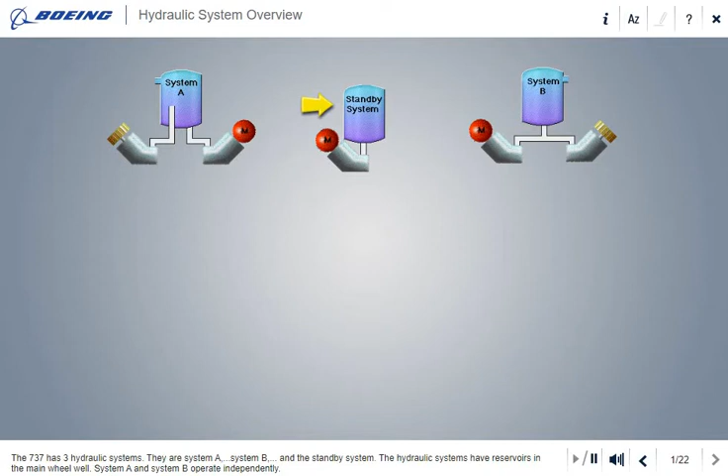The 737 has three hydraulic systems: System A, System B, and the standby system. The hydraulic systems have reservoirs in the main wheel well. System A and System B operate independently.

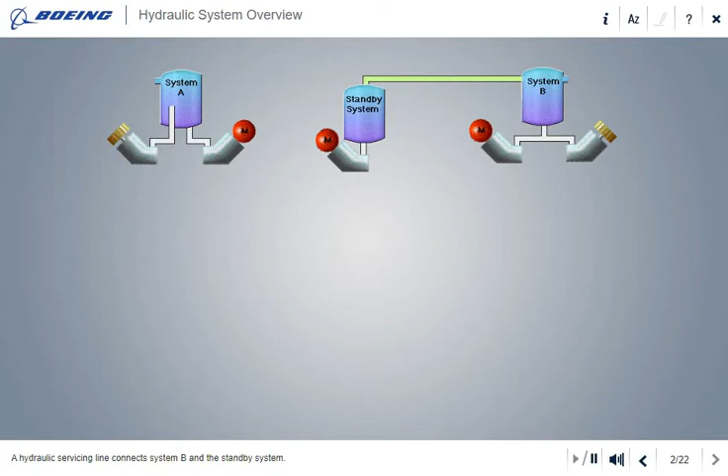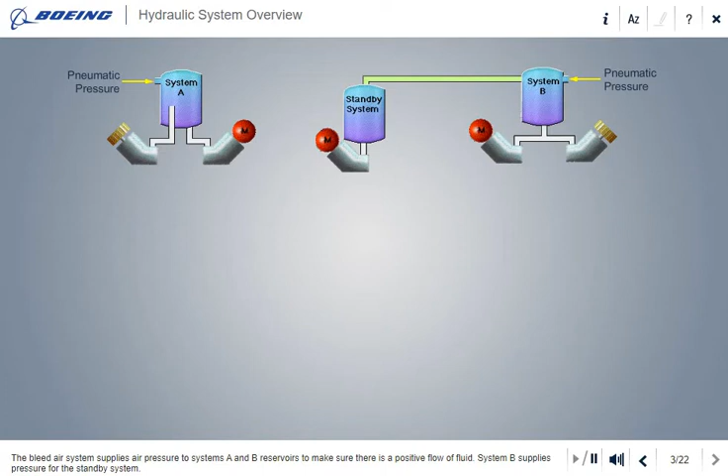A hydraulic servicing line connects System B and the standby system. The bleed air system supplies air pressure to Systems A and B reservoirs to make sure there is a positive flow of fluid.

System B supplies pressure for the standby system. The number 1 engine-driven hydraulic pump and an AC electric motor-driven pump supply the pressure for System A. Under normal conditions, the number 2 generator powers the electric motor-driven pump for System A.

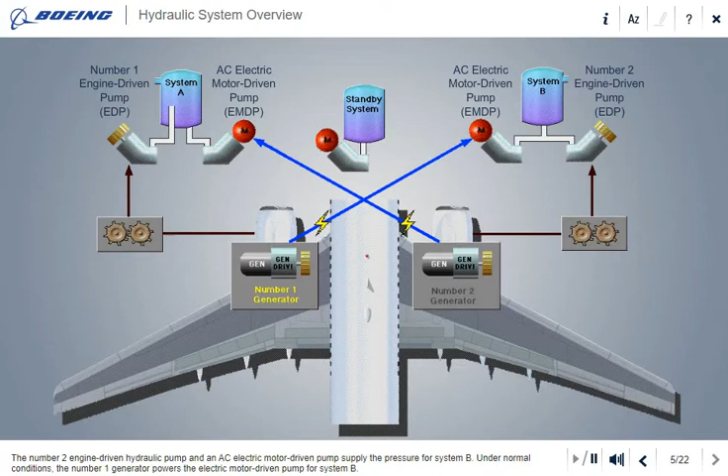The number 2 engine-driven hydraulic pump and an AC electric motor-driven pump supply the pressure for System B. Under normal conditions, the number 1 generator powers the electric motor-driven pump for System B. One AC electric motor-driven pump supplies the pressure for the standby system.

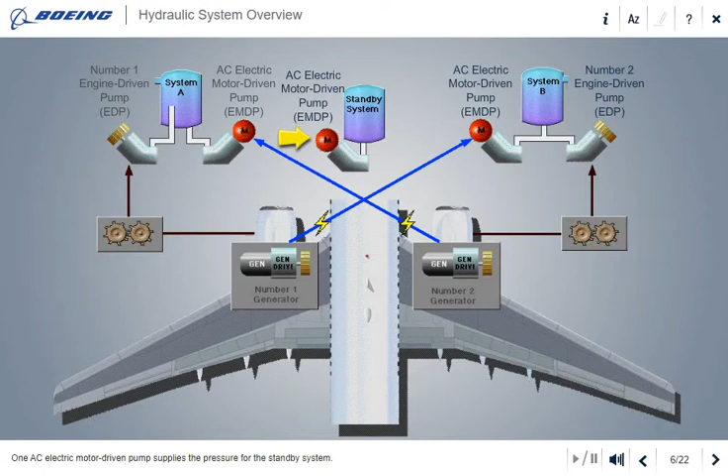System A supplies hydraulic power to these units, and System B supplies hydraulic power to these units. If Systems A and B do not operate, the standby system is available to supply hydraulic pressure to the rudder, the leading edge devices, and the thrust reversers.

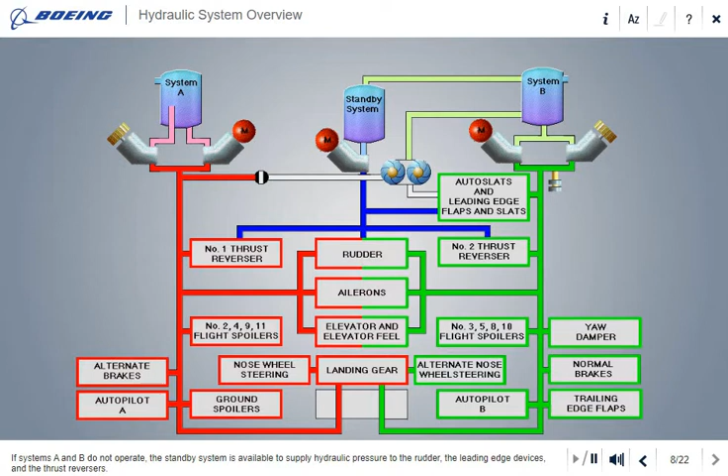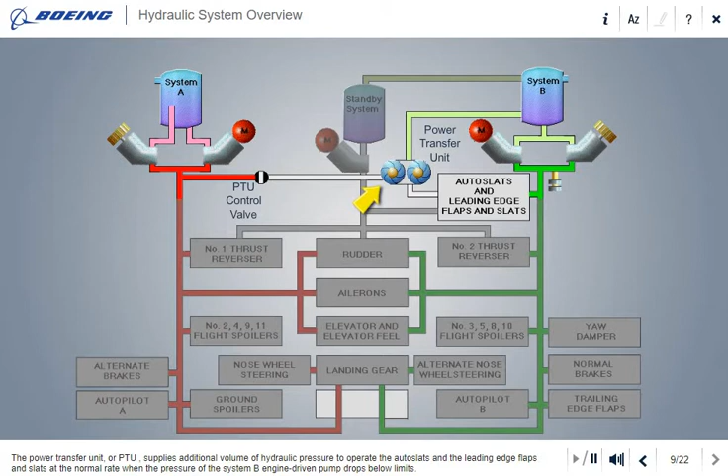The Power Transfer Unit, or PTU, supplies additional volume of hydraulic pressure to operate the auto slats and the leading edge flaps and slats at the normal rate when the pressure of the System B engine-driven pump drops below limits. The PTU control valve opens when the output pressure from the System B engine-driven pump drops below limits.

This occurs when the airplane is in flight, and the flaps are less than 15 but not up. When the PTU control valve opens, System A supplies hydraulic pressure to operate the PTU. The PTU uses System B fluid to supply pressure for the auto slat system and the leading edge flaps and slats.

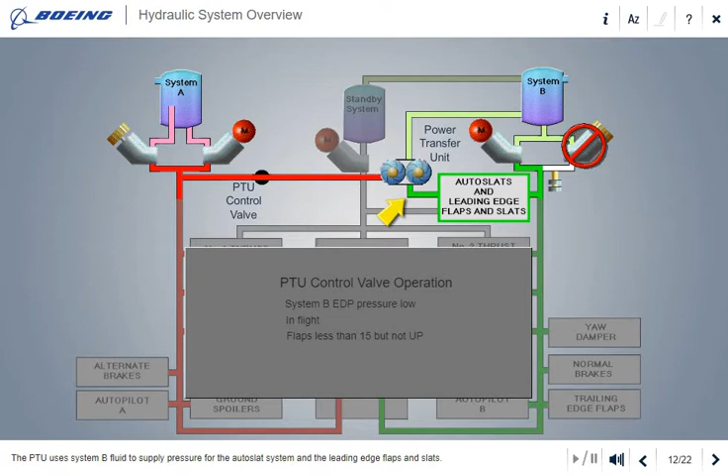If the number 1 engine fails, the landing gear transfer unit supplies hydraulic fluid volume from System B to raise the landing gear. In System A and System B, the engine-driven pumps supply a larger volume of fluid than the electric motor-driven pumps.

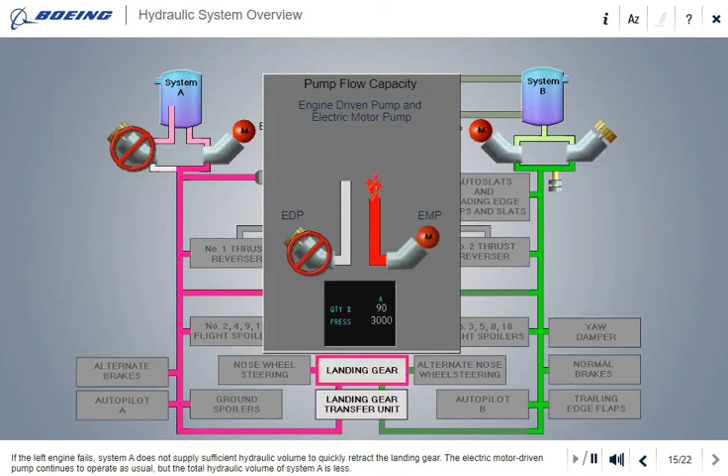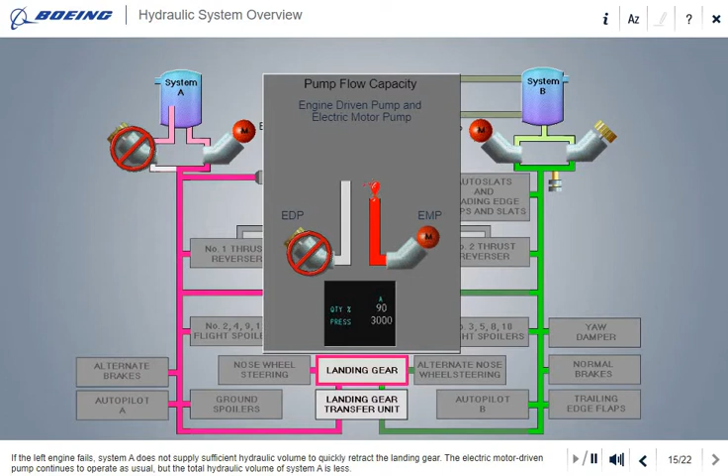If the left engine fails, System A does not supply sufficient hydraulic volume to quickly retract the landing gear. The electric motor-driven pump continues to operate as usual, but the total hydraulic volume of System A is less. The landing gear transfer unit operates when the number 1 engine N2 is less than idle.

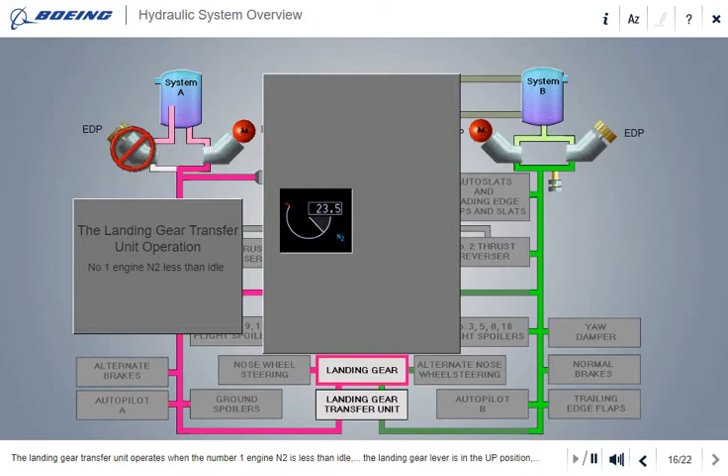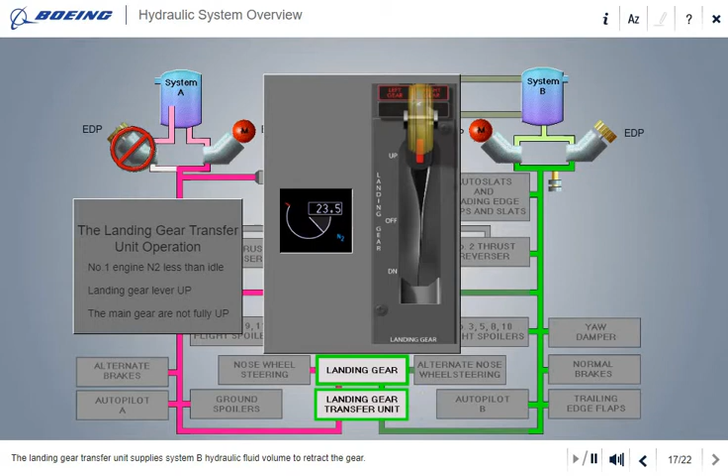The landing gear lever is in the up position, and one of the main gear is not in the fully up position. The landing gear transfer unit supplies System B hydraulic fluid volume to retract the gear.

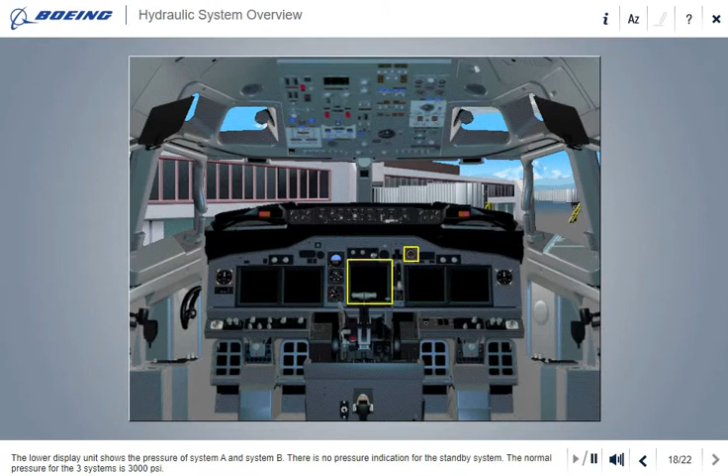The lower display unit shows the pressure of System A and System B. There is no pressure indication for the standby system. The normal pressure for the 3 systems is 3,000 psi.

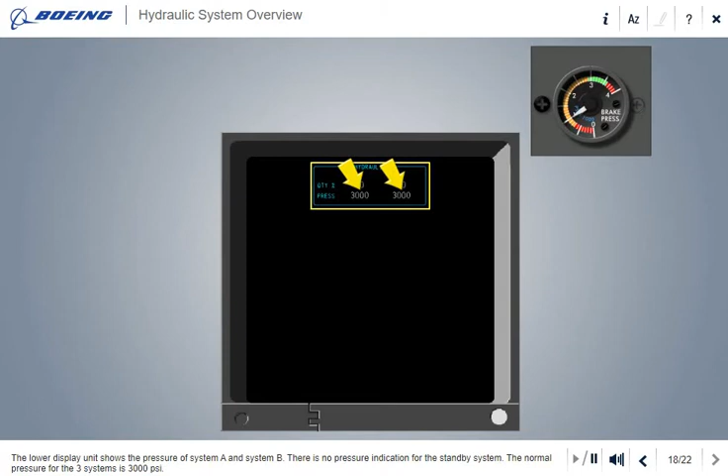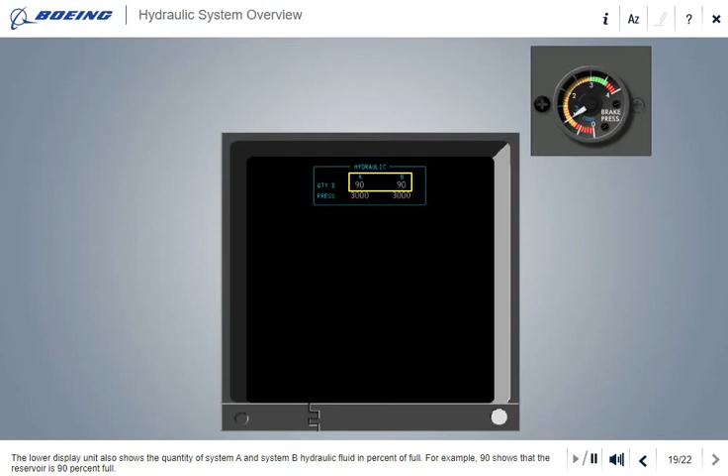The lower display unit also shows the quantity of System A and System B hydraulic fluid in percent of full. For example, 90 shows that the reservoir is 90% full. If the quantity is low and the airplane is on the ground, the system shows the letters RF or refill adjacent to the quantity indications.

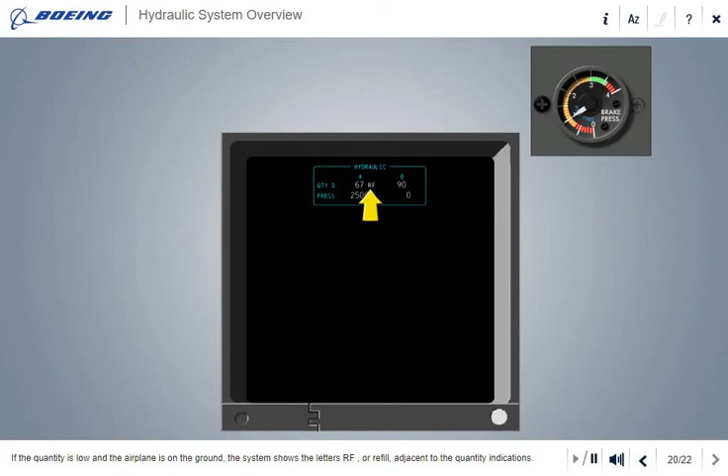The hydraulic brake pressure indicator shows the hydraulic brake pressure. The normal brake pressure is 3,000 psi.

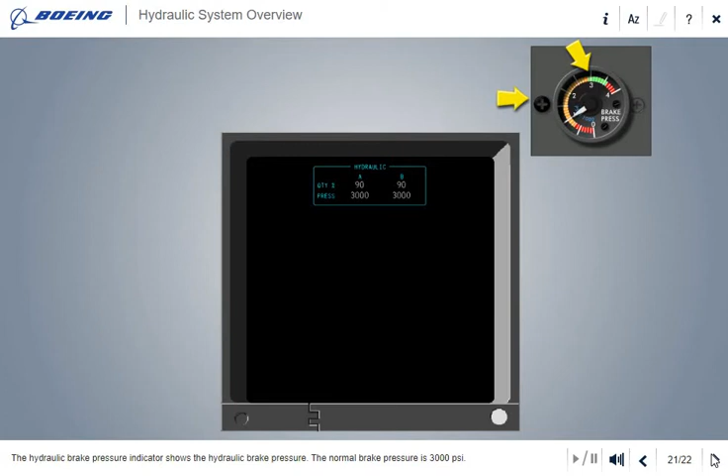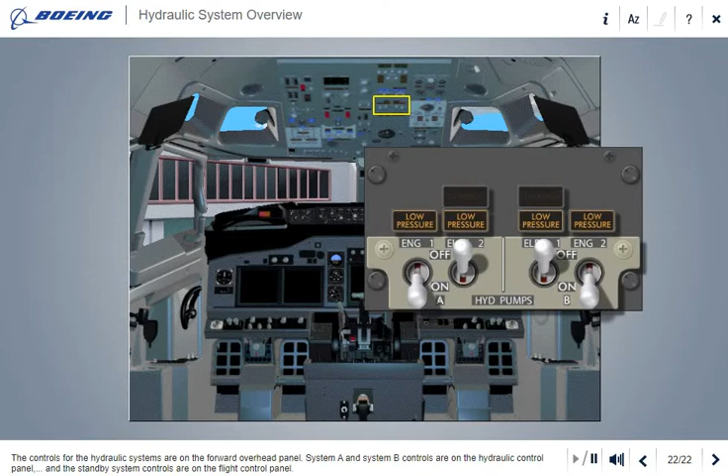The controls for the hydraulic systems are on the forward overhead panel. System A and System B controls are on the hydraulic control panel, and the standby system controls are on the flight control panel.

Now let's discuss the normal operation of the hydraulic systems A and B.

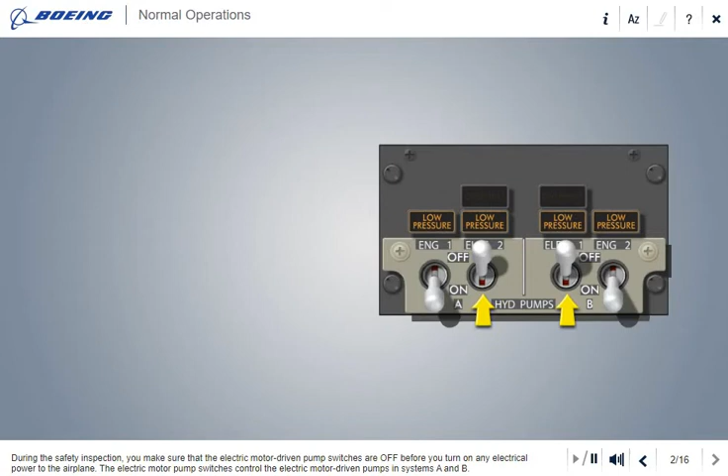During the safety inspection, you make sure that the electric motor-driven pump switches are off before you turn on any electrical power to the airplane. The electric motor pump switches control the electric motor-driven pumps in Systems A and B. The engine-driven pump switches control the related engine-driven pumps.

Systems A and B lower the temperature of some hydraulic fluid with heat exchangers in the main fuel tanks. Before you operate the hydraulic system on the ground, you must make sure that there is fuel in the main wing tanks.

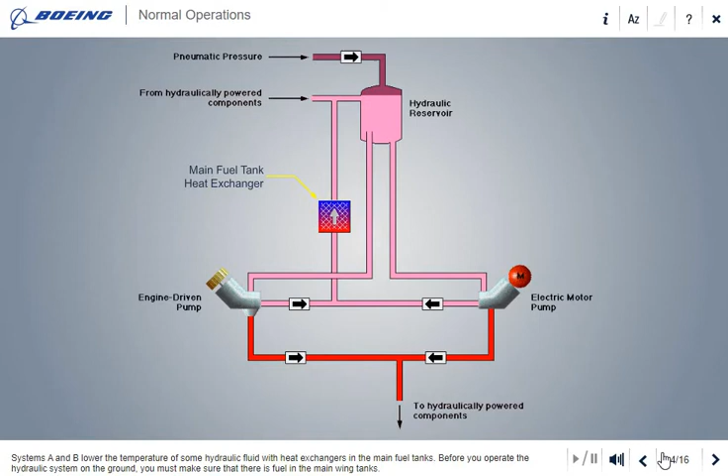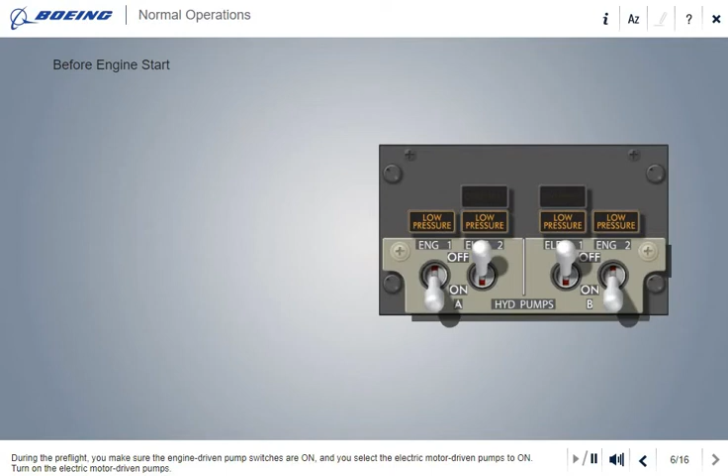The low pressure lights show that the output pressure from the related pump is low. During the pre-flight, you make sure the engine-driven pump switches are on, and you select the electric motor-driven pumps to on. Turn on the electric motor-driven pumps.

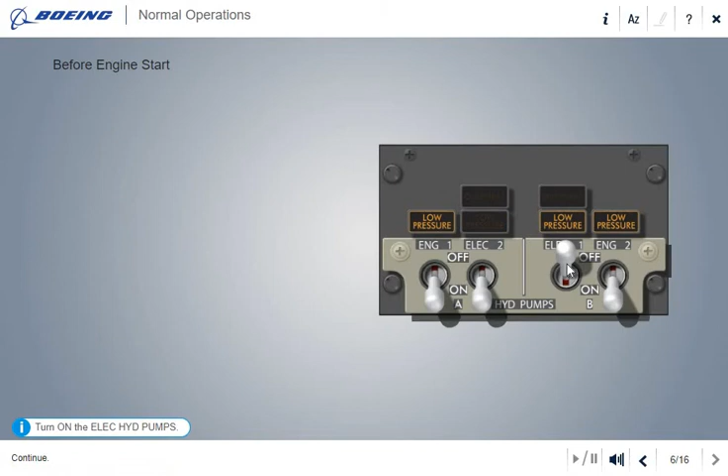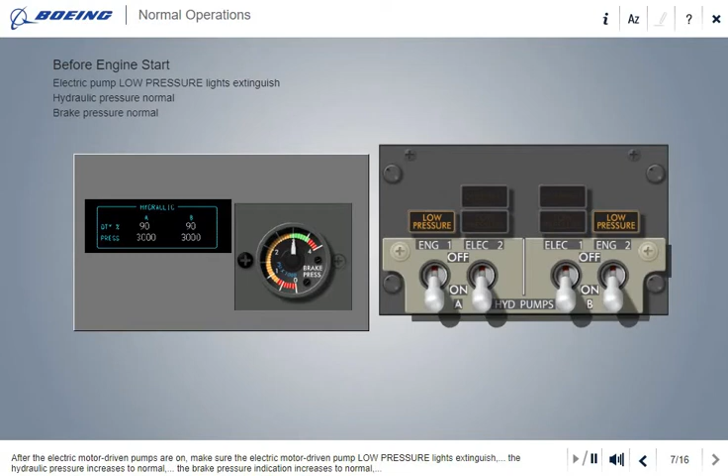After the electric motor-driven pumps are on, make sure the electric motor-driven pump low pressure lights extinguish. The hydraulic pressure increases to normal. The brake pressure indication increases to normal, and the hydraulic quantity indications do not show RF.

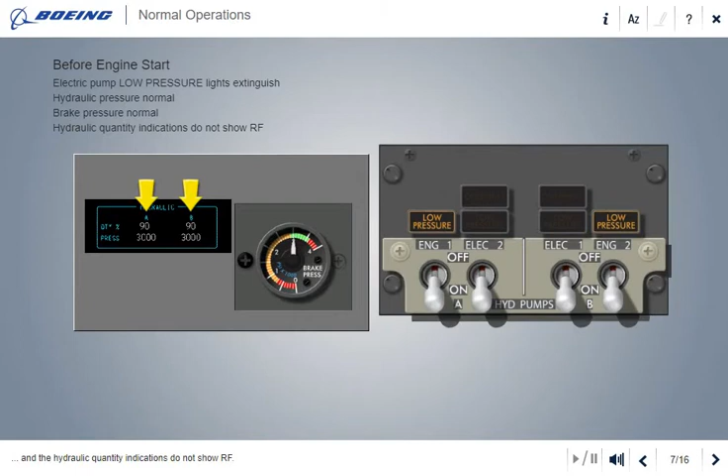During pushback, if the nose gear steering lockout pin is not installed, you must turn off the System A hydraulic pumps.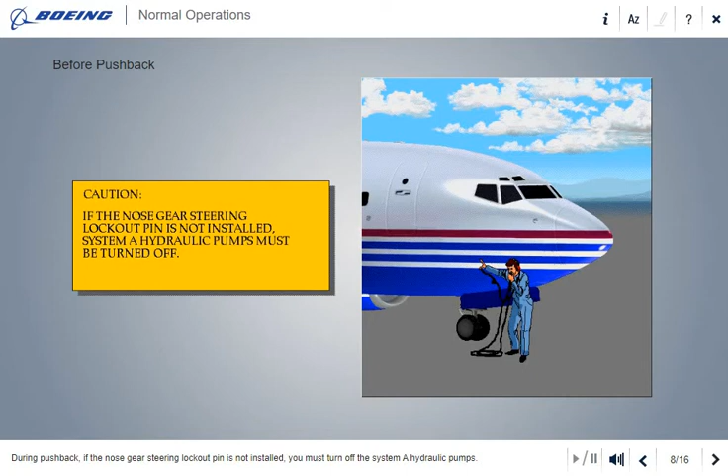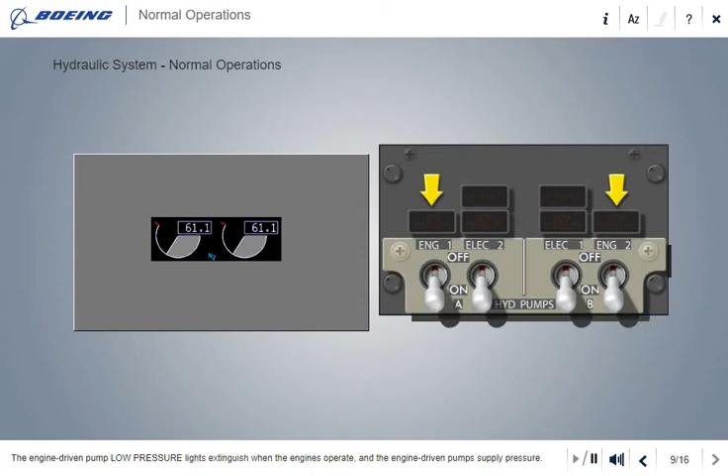The engine-driven pump low pressure lights extinguish when the engines operate and the engine-driven pumps supply pressure. Now turn off the number 1 engine-driven pump.

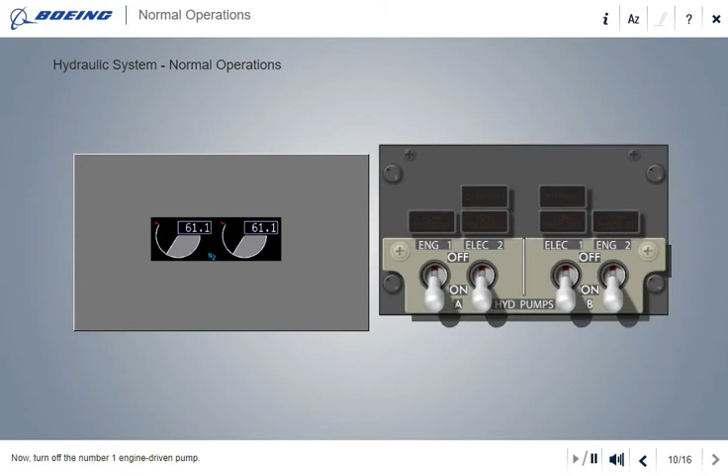When you select off with the engine-driven pump switch, a solenoid closes and holds the blocking valve and fluid does not go through the related pump. The engine-driven pump continues to operate, but does not supply pressure.

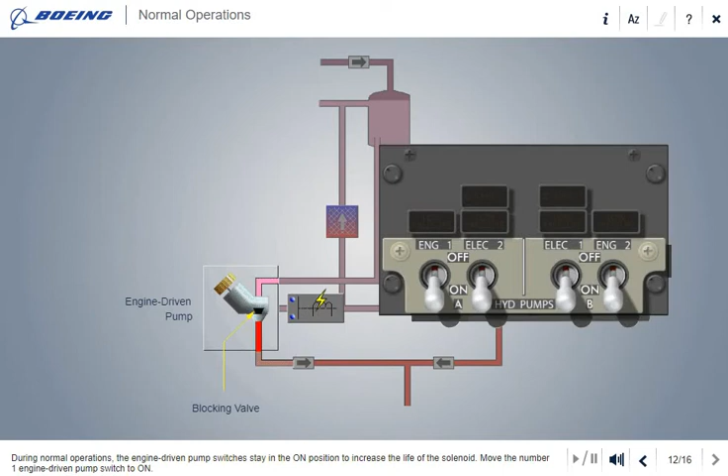During normal operations, the engine-driven pump switches stay in the on position to increase the life of the solenoid. Move the number 1 engine-driven pump switch to on. The hydraulic system is ready for flight.

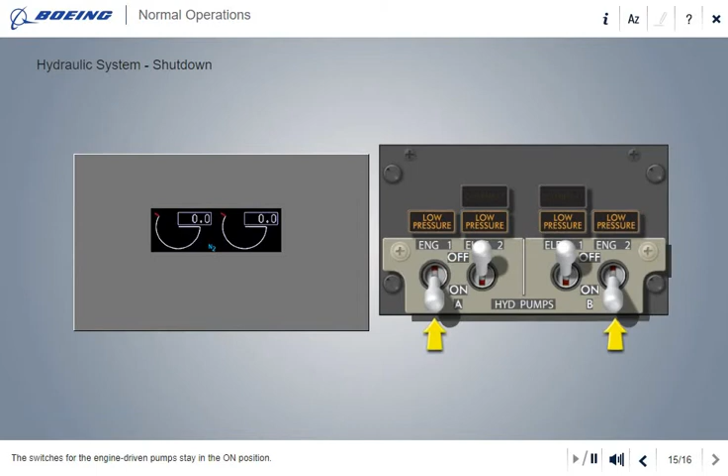To shut down the hydraulic system after taxi-in, turn off the electric hydraulic pumps. The switches for the engine-driven pumps stay in the on position.

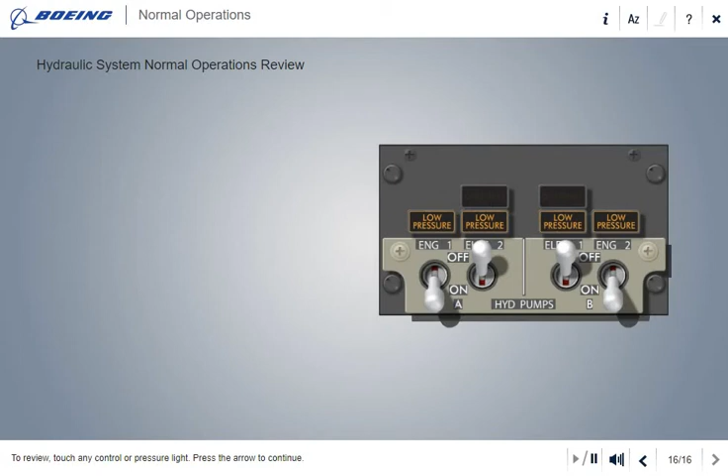To review, touch any control or pressure light. Press the arrow to continue.

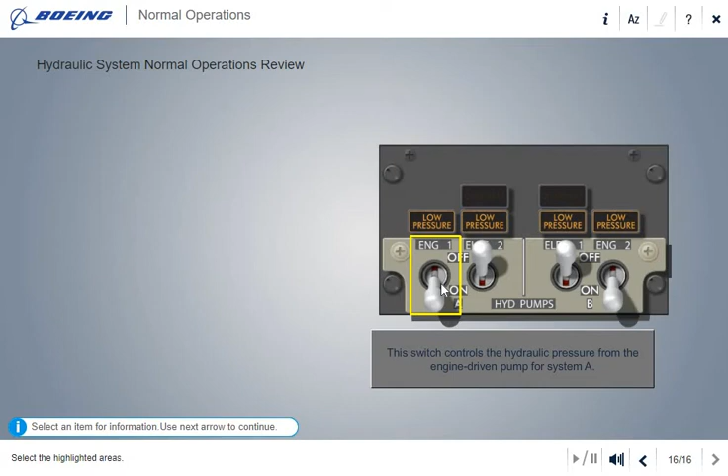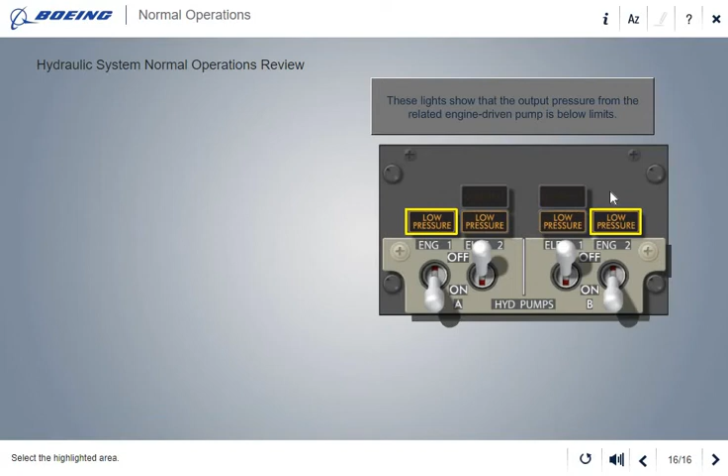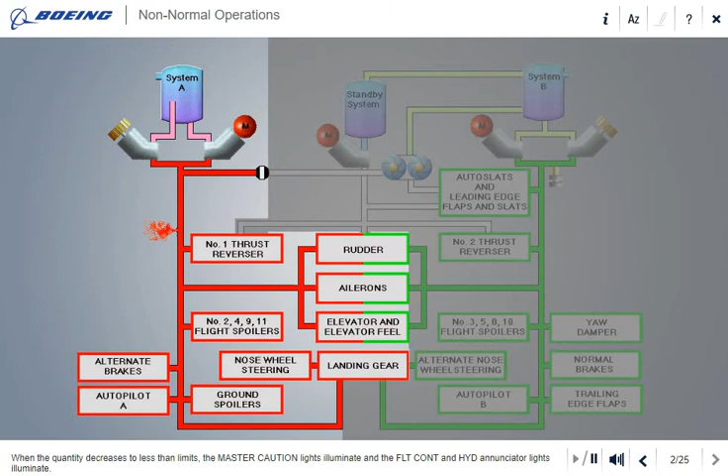During flight, there is a failure in System A and the hydraulic fluid quantity decreases. When the quantity decreases to less than limits, the master caution lights illuminate and the flight control and hydraulic annunciator lights illuminate.

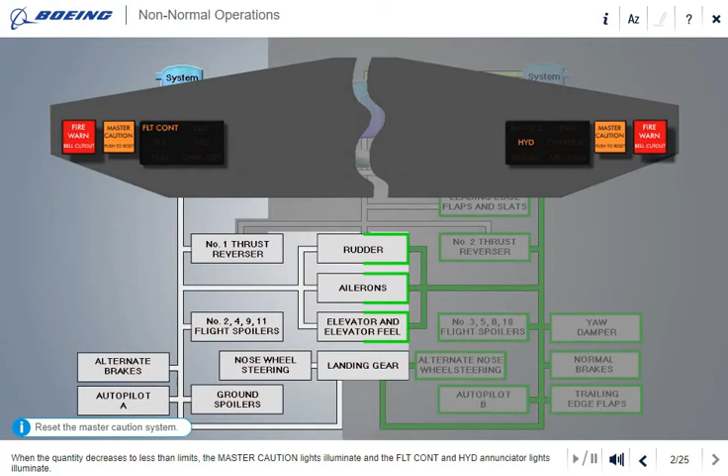On the overhead panel, the low pressure lights for the System A pumps illuminate. Turn off the System A hydraulic pumps.

The System A flight control low pressure light illuminates because System A pressure to the flight controls is low. Select Standby Rudder with the System A flight controls switch to activate the standby hydraulic system.

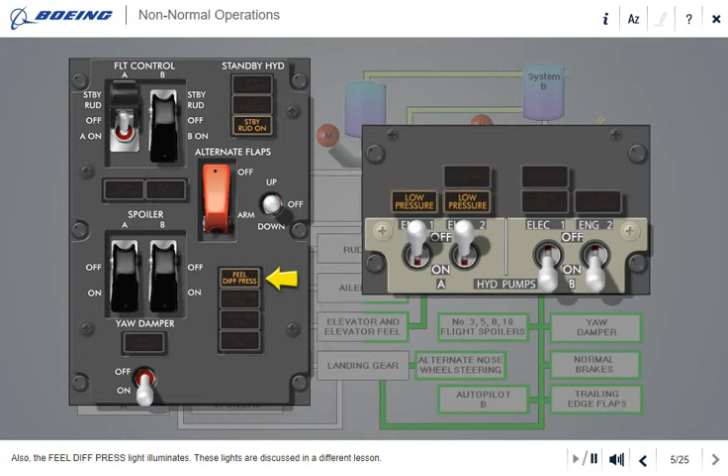Also, the feel differential pressure light illuminates. These lights are discussed in a different lesson. The System A pressure and the quantity indications are low.

When System A does not operate, these components do not operate. The rudder, the ailerons, the elevator, and the elevator feel continue to operate because System B supplies hydraulic pressure to these units.

Half of the flight spoilers do not operate. System B supplies pressure to the remaining flight spoilers.

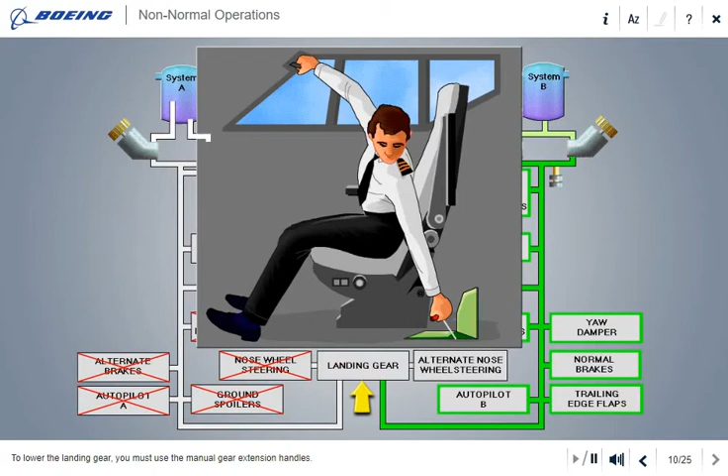To lower the landing gear, you must use the manual gear extension handles. To supply hydraulic pressure for nose gear steering, you must select alternate with the nose wheel steering switch.

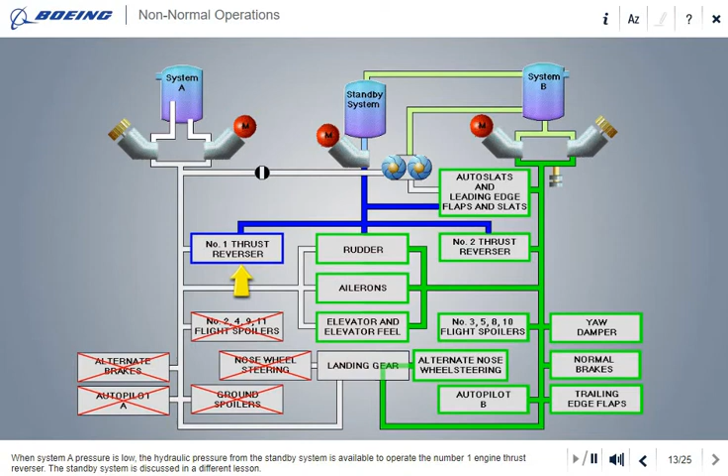System B now supplies hydraulic pressure for nose wheel steering when the airplane is on the ground. When System A pressure is low, the hydraulic pressure from the standby system is available to operate the number 1 engine thrust reverser. The standby system is discussed in a different lesson.

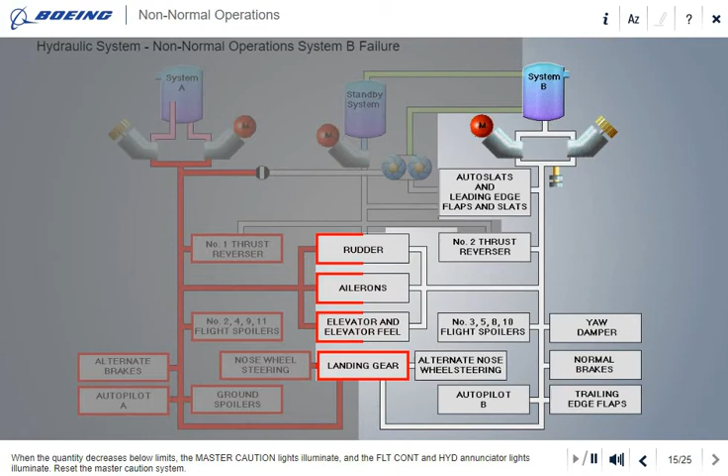During flight, there is a failure in System B and the hydraulic fluid quantity decreases. When the quantity decreases below limits, the master caution lights illuminate and the flight control and hydraulic annunciator lights illuminate.

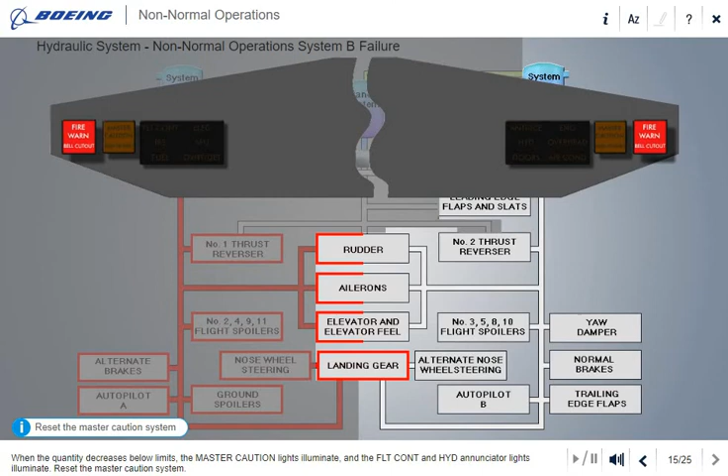Reset the master caution system. On the overhead panel, the System B flight control low pressure light illuminates.

The feel differential pressure light illuminates. The System B low pressure lights illuminate, and the System B pressure and quantity are low. Now, turn off the System B hydraulic pumps and select standby rudder with the System B flight controls switch.

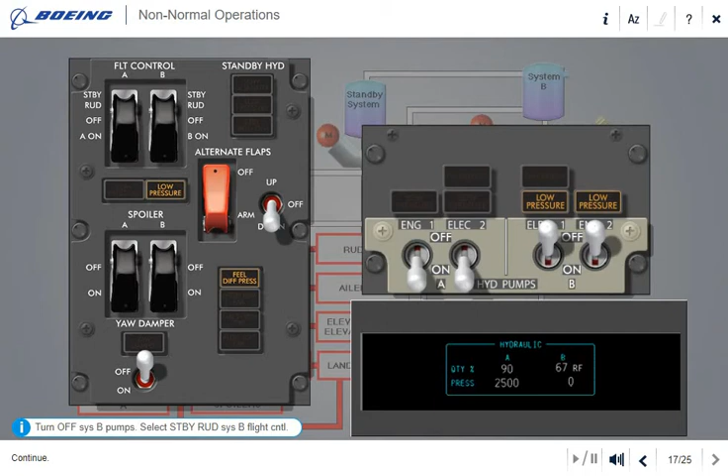When there is a failure of System B, these systems do not operate. The rudder, ailerons, elevator, and elevator feel continue to operate because System A supplies pressure to these units.

Half of the flight spoilers do not operate. System A supplies hydraulic pressure to the remaining units. The yaw damper does not operate.

Although the normal brakes do not operate, System A supplies pressure for the alternate brakes.

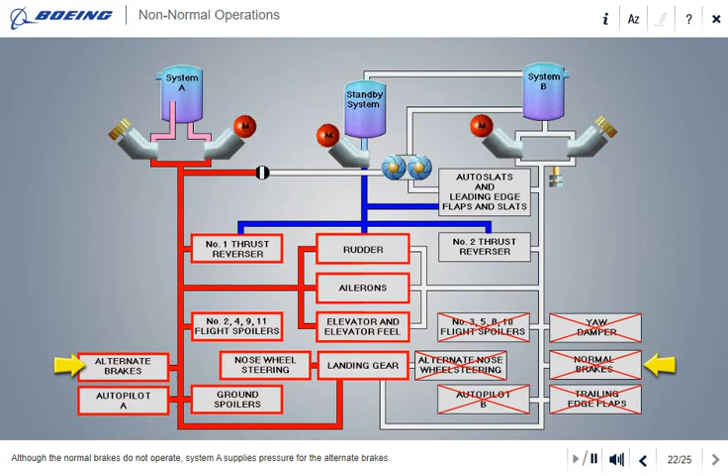When System B pressure is low, the standby system is available to supply hydraulic pressure to the leading edge devices and the number 2 engine thrust reverser.

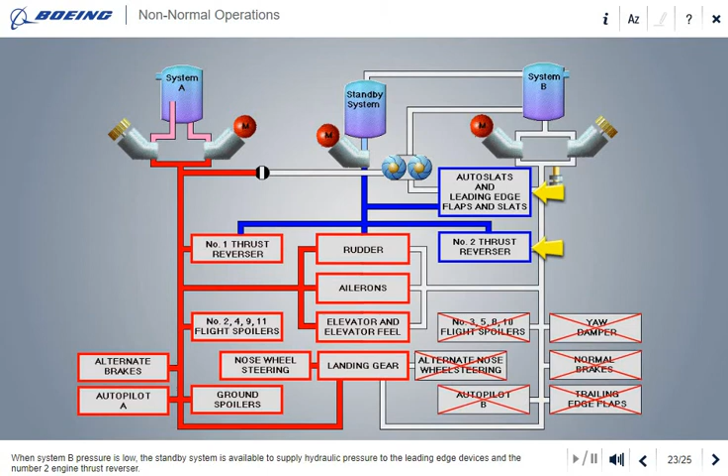If the temperature of the electric motor-driven pumps or the related hydraulic fluid is higher than limits, the related overheat light illuminates. Turn off the electric motor-driven hydraulic pumps.

The related hydraulic system continues to operate with pressure from the related engine-driven pump.

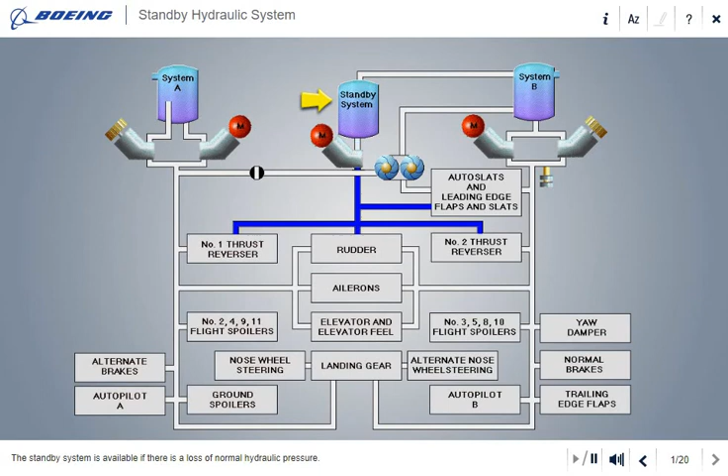The standby system is available if there is a loss of normal hydraulic pressure. To manually turn on the standby hydraulic system, you use one of the flight control switches, or you use the alternate flaps switch.

With the System A flight control switch or the System B flight control switch, you control the standby hydraulic pressure that goes to the rudder. Select Standby Rudder with the System A flight control switch and note the standby hydraulic low pressure light illuminates briefly.

When you select Standby Rudder, the standby pump operates. To verify the pump operates, the low pressure light illuminates for approximately 1 second.

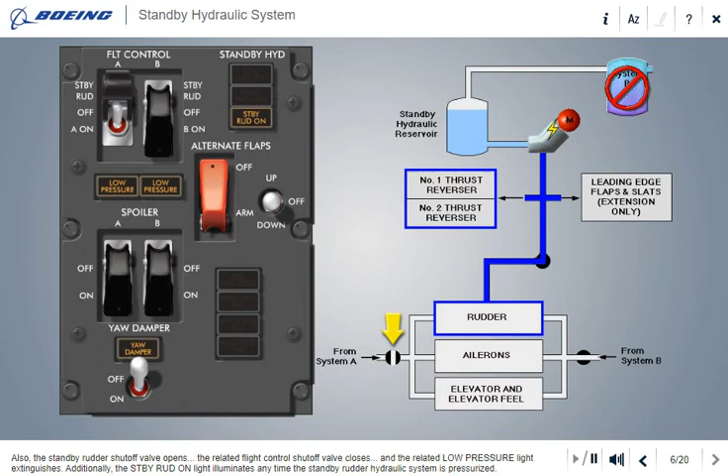Also, the standby rudder shutoff valve opens, the related flight control shutoff valve closes, and the related low pressure light extinguishes. Additionally, the standby rudder on light illuminates anytime the standby rudder hydraulic system is pressurized.

Now select standby rudder with the System B flight control switch and look at the indications. Now close the guards for both flight control switches.

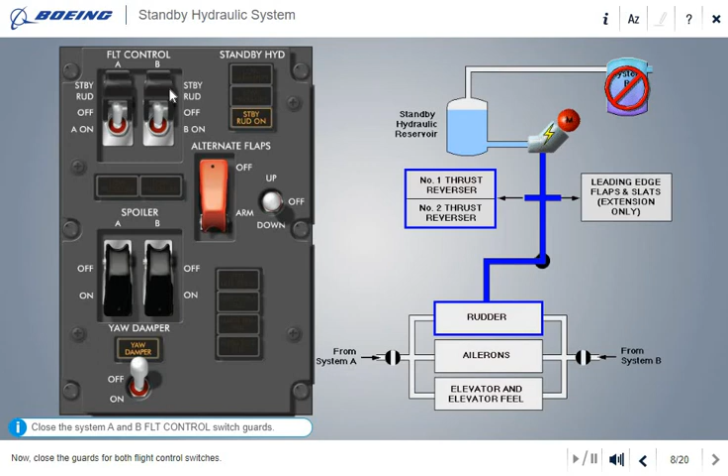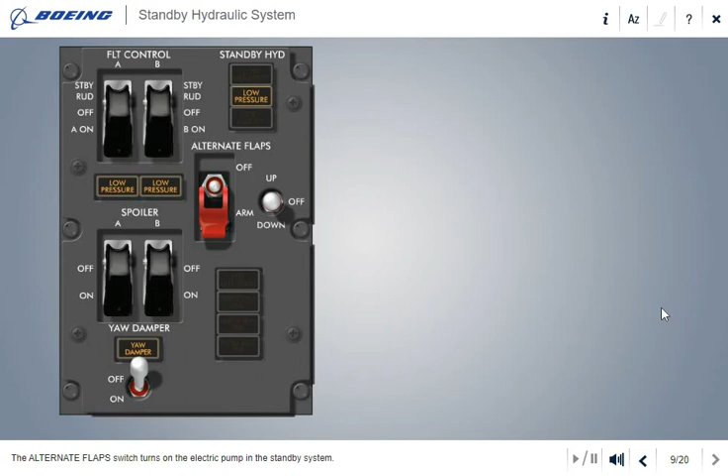Now select Arm with the alternate flaps switch. The alternate flaps switch turns on the electric pump in the standby system. The standby hydraulic system is now available to extend the leading edge flaps and slats.

Standby hydraulic pressure is also available to operate the thrust reversers. Note that in this case, the standby rudder on light does not illuminate because the standby rudder system is not pressurized.

Now turn off the alternate flaps.

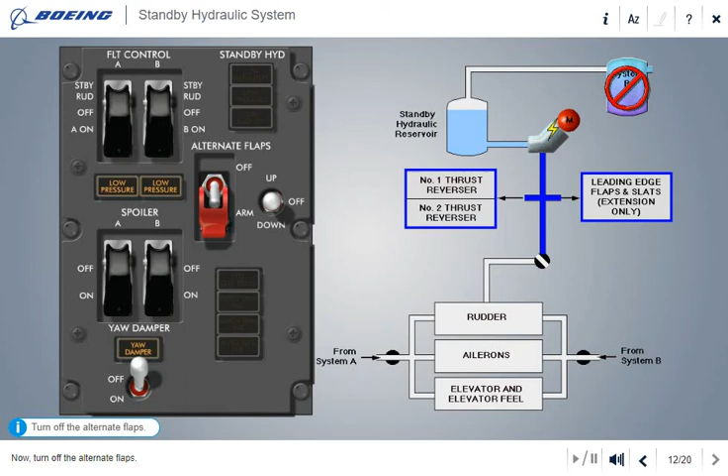During takeoff and landing, the standby hydraulic system can operate to supply hydraulic pressure to the rudder without flight crew action.

The standby pump operates and the standby rudder shutoff valve opens when the pressure in System A or System B is low and the flaps are extended, and the airplane is airborne or the wheel speed is greater than 60 knots. When these three conditions are true, the standby system supplies hydraulic pressure to the rudder.

Flight crew action is not necessary. The standby system operates until the flaps are fully up.

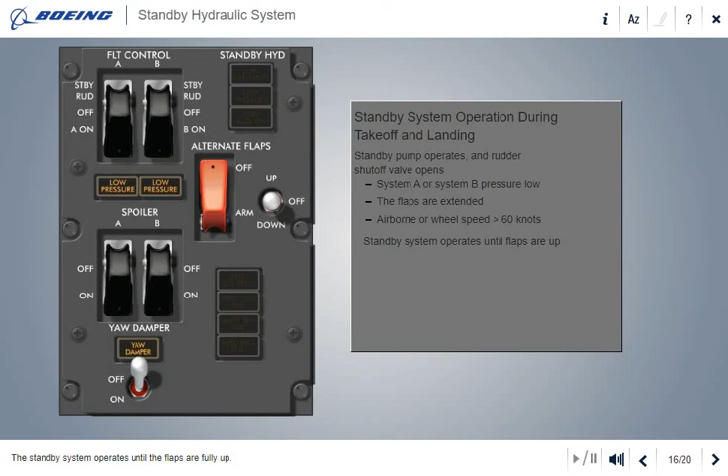The low quantity light illuminates if the quantity in the standby system is low. The light is always armed.

If System A and System B do not operate, and the standby system low quantity light illuminates, the rudder, the thrust reversers, and the leading edge devices do not operate. The low pressure light for the standby system shows the output pressure from the standby pump is low.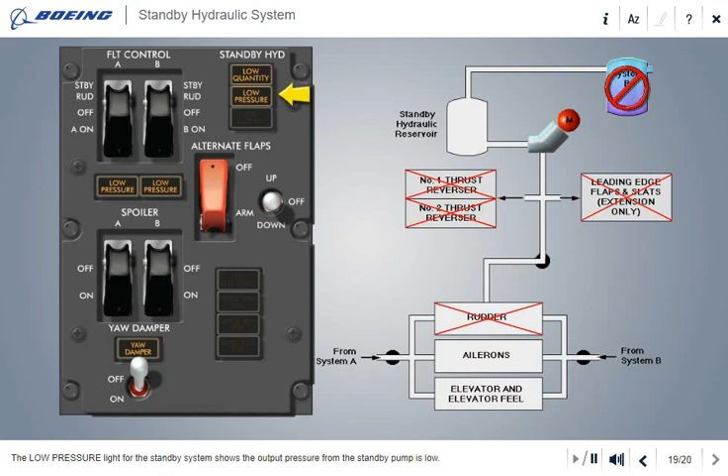Touch any standby hydraulic system control or indicator to review. Touch the arrow to continue.

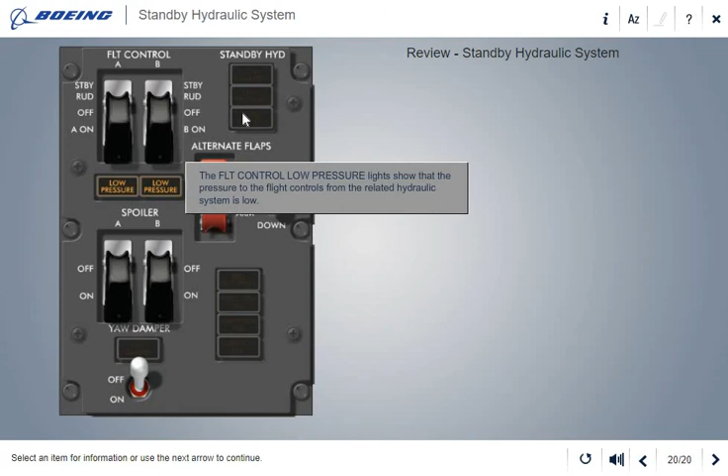Before engine start, pre-flight the hydraulic panel. Ensure the hydraulic panel is ready for flight.

After you pre-flight the hydraulic panel, you see these indications. Are they correct?

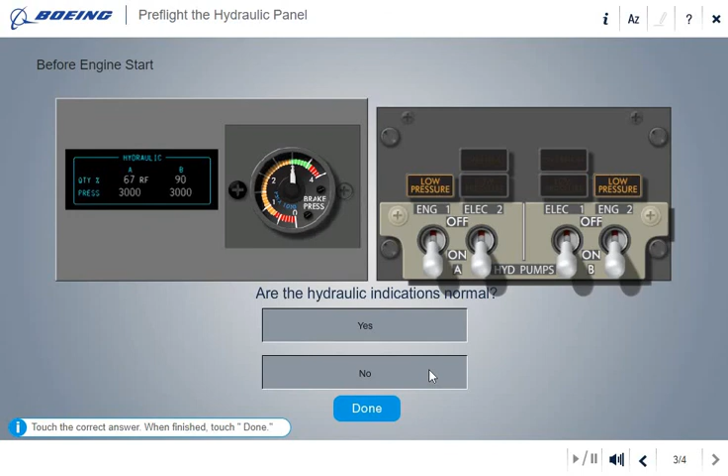The quantity in System A is low. Call maintenance before you continue.